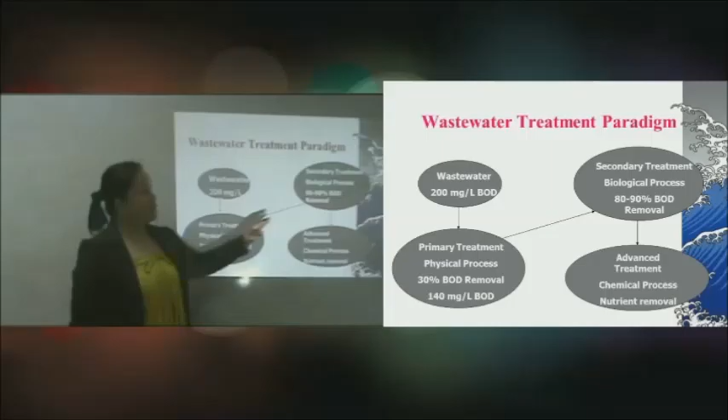Now, for water and wastewater treatment, there's what you call a paradigm. For you to determine what the paradigm means in treating your water or wastewater, I have here a figure that would help you decide which part of the paradigm is optional and which part is a must. For example, you're given 200 milligrams per liter BOD.

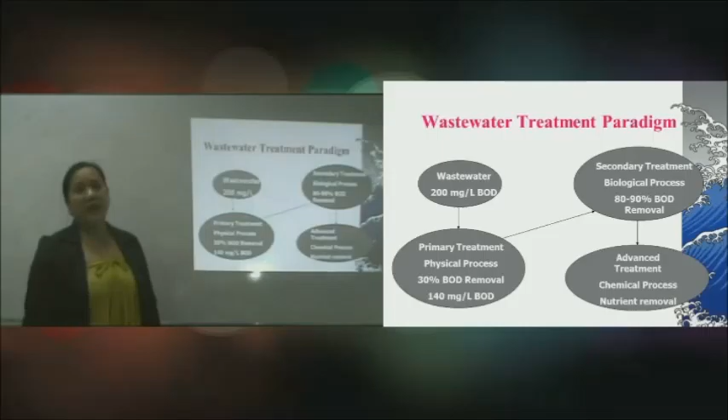We have here BOD, biochemical oxygen demand. And the wastewater gets into primary treatment. So what is primary treatment? Normally you utilize physical processes, as we have discussed, and it has been found to remove 30% of the contaminant or pollutant. In this case, you remove 30% of the BOD. That means what is left is 140 ppm.

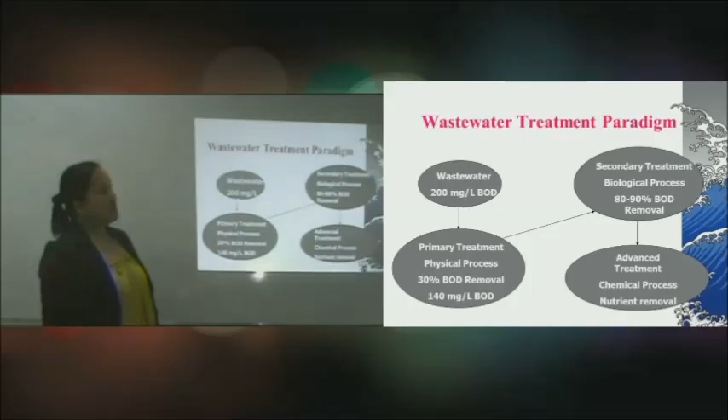Now, depending on the function or objective of the treatment, remember we have two treatment objectives: you have to save the environment, and you have to comply with the regulations of the government. In the regulatory requirement of the Philippines, the Class C water, which refers to your Laguna Lake, has a BOD limit of 50 milligrams per liter.

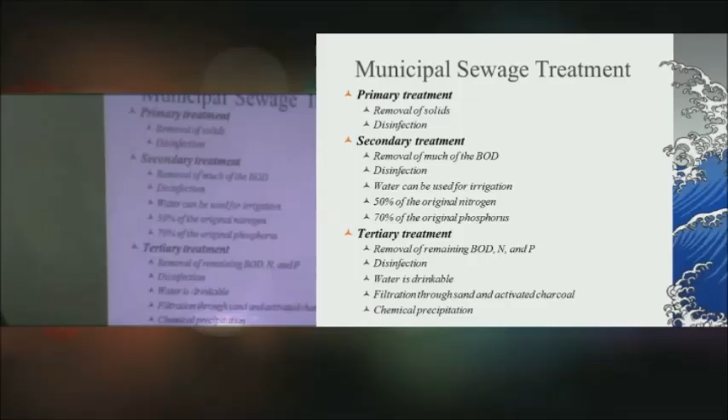So if I may ask you, at this point, after having the primary treatment, can you stop treating? No, because you have not reached the requirement yet. So you have to go to the secondary treatment. Secondary treatment is normally done using biological processes, and it has been found to decrease contaminants, in this example, 80 to 90% BOD removal.

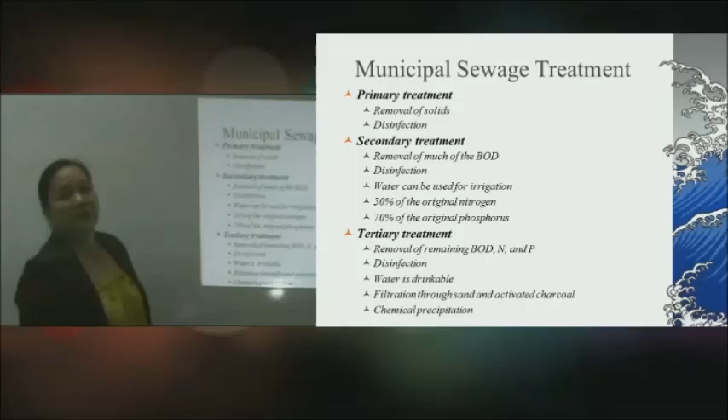From here, question: if it is just for the purpose of discharging to the lake, for example Laguna Lake, which has a limit of 50 ppm of BOD, can you already do the discharging? Yes, because you have already met the standard of 50 ppm. Therefore, for that particular objective, we say that we stop at this paradigm.

However, what if you would like to have the water or wastewater recycled in the process? Or let's say you would want to have this utilized for watering your plants, or you would want to use it for the laboratories, rather in the industry. You need to do some additional treatment, and this would tell you that you need to proceed with the next paradigm.

That is the advanced treatment, or sometimes called tertiary treatment. Here we employ chemical processes, and we also have the objective, aside from meeting that requirement, to remove nutrients. Now, I've heard that in the most recently revised EIA law, all wastewater treatment plants are required to have this nutrient removal facility, which is actually a digester. We have some figures in the succeeding slides.

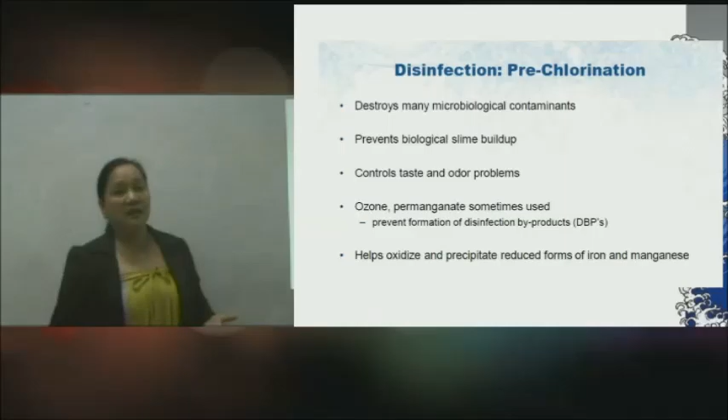Okay, so to recap, how do you apply the wastewater paradigm? For the primary treatment, your objective is just removal of solids. Then you have disinfection. But notice, class, disinfection is present on each part, because that is to ensure that some of the coliforms, depending on the strength of the pathological and non-pathological contaminants that you have in the water, are addressed, so that is where you have to employ disinfection.

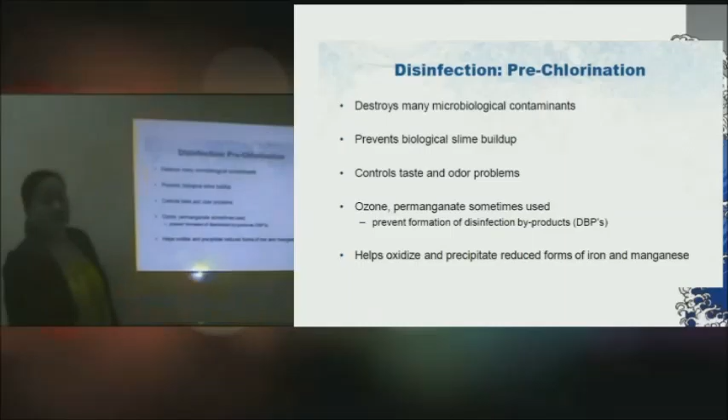For the secondary treatment, you have to remove the BOD, and at this point you can already use it for irrigation. With respect to the nitrogen, it still contains 50% of it, while for the phosphorus, it still contains 70% of it. For the tertiary treatment, your objective is to remove remaining BOD, N, and P. At this point, it is already drinkable.

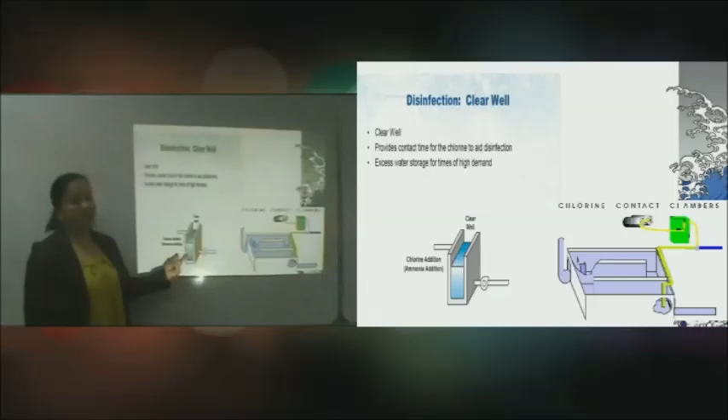The water here is drinkable. And then normally, depending on the size of the dissolved particles, sand and activated charcoal can be utilized, or sometimes you can make use of chemical precipitation.

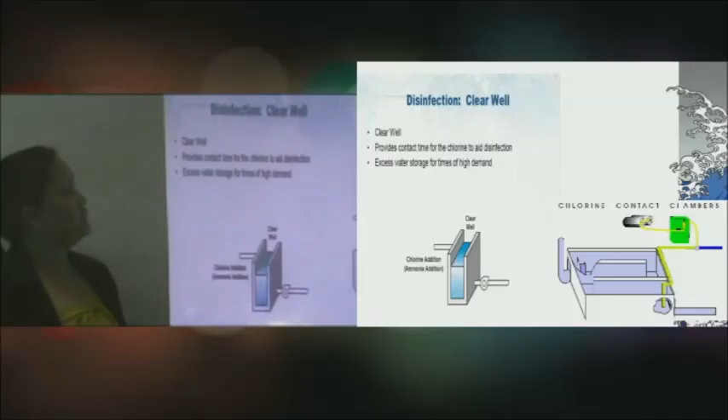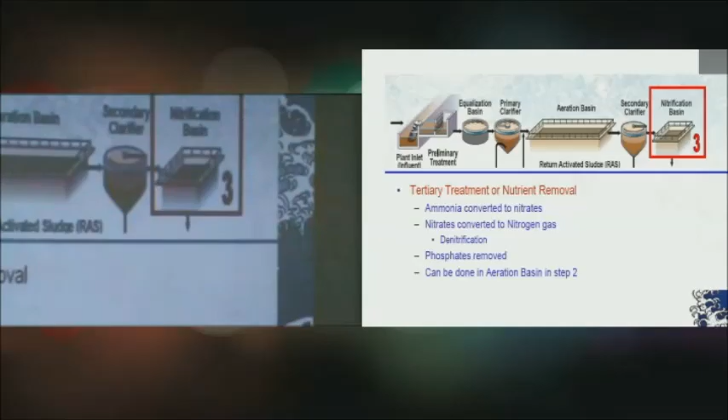Okay, we've mentioned about disinfection. So for disinfection, although chlorination is the most commonly utilized, they also utilize some processes such as ozonation. However, the process of ozonation - you know what O3 is, right? It has a radical, a very active radical.

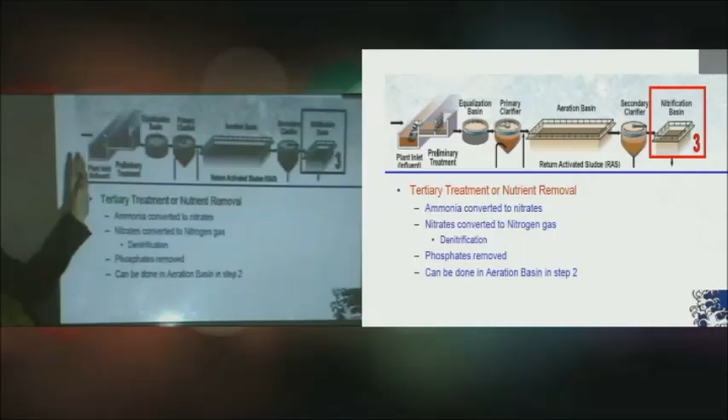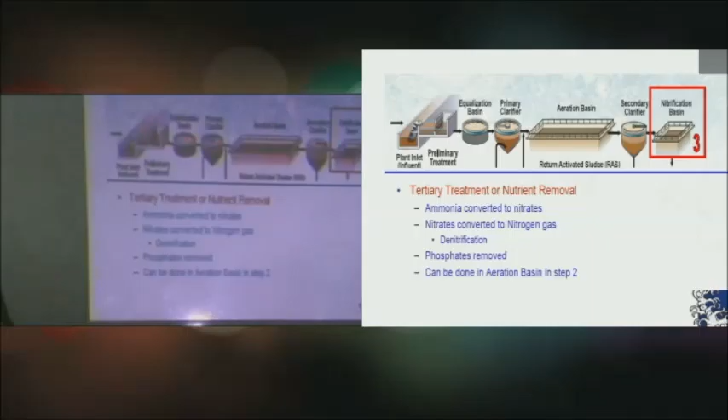Therefore, the problem that we encountered here is that it easily corrodes the pipelines, unless otherwise you enclose the ozonator properly. And also, since it's very difficult for you to contain the ozone when the radical starts to corrode the metals as well as the equipment itself, there would also be a probability of leaking. So that would be more unsafe for the crew or staff of the wastewater treatment plant. So normally, in industry, it is not so often that they utilize ozone.

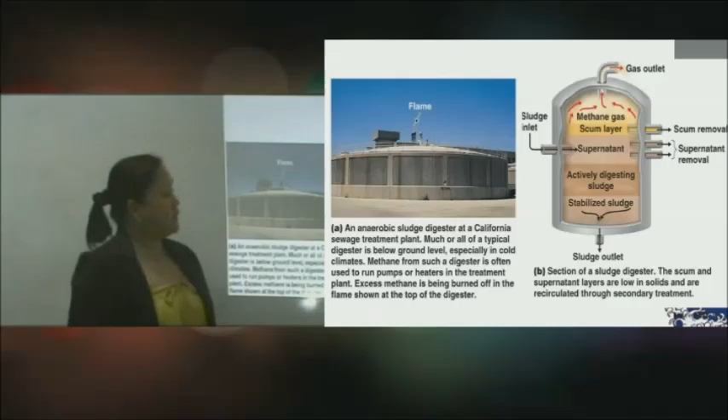Now, for chlorine, chlorination, as you notice in the discussion of the diagram, may be done from primary, secondary, tertiary. Now, why or how would you decide whether you utilize chlorine at the primary and the secondary and not only at the post-treatment? Because of this.

So if you have too much of the microbiological contaminants, if you notice that there are some biological slime build-up, if there is a persistent taste and other problems, and if you want to oxidize and precipitate some of the dissolved solids, you have to use prechlorination.

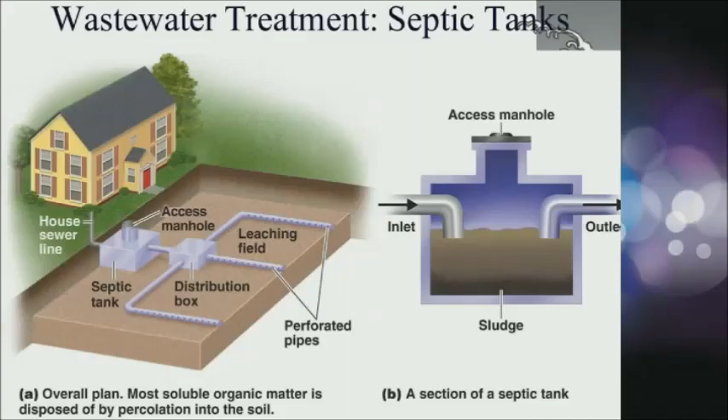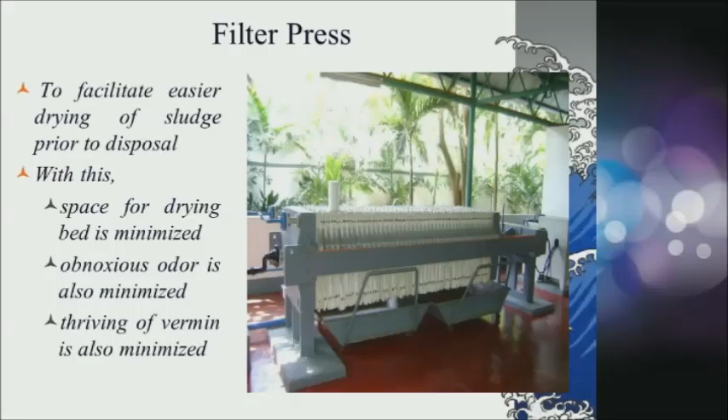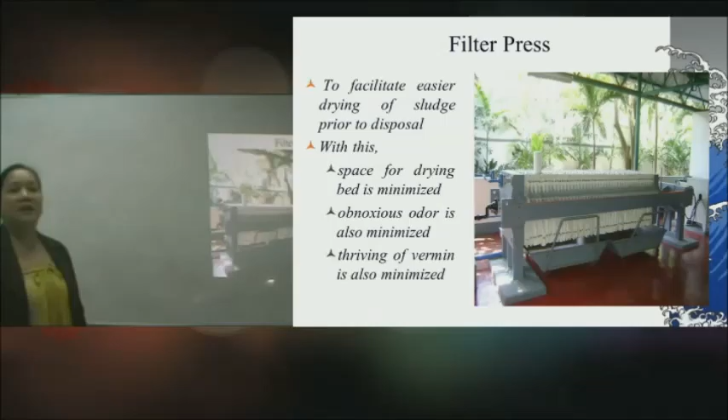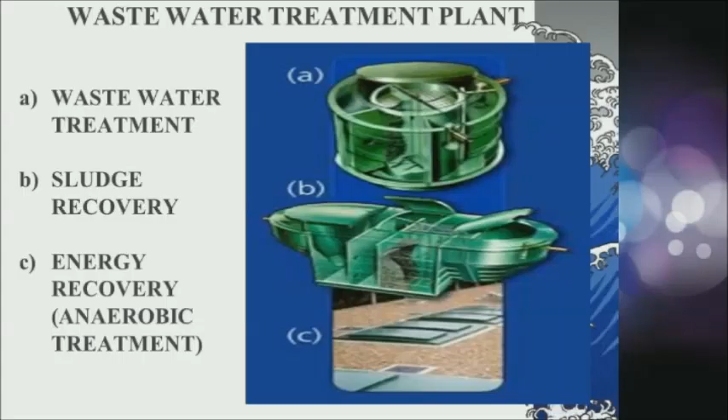This is the portion which the new amended EIA law would like to impose for all wastewater treatment plants: the addition of a nitrification basin, sometimes called a digester. For tertiary treatment or nutrient removal, the objective is converting ammonia to nitrates. The nitrates should be converted to nitrogen gas through denitrification, and at the same time the phosphates would be removed.